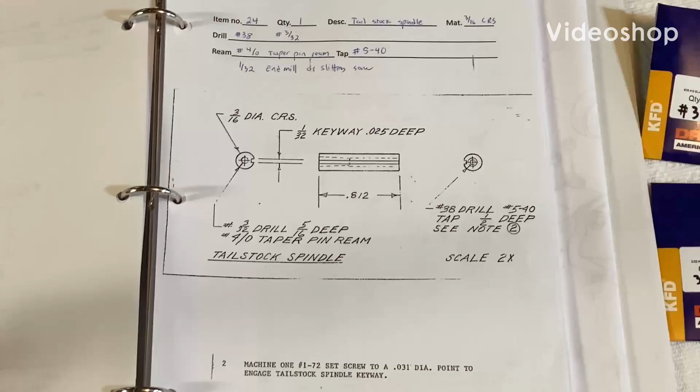Okay, we're back on the lathe again, and this time I decided to do the tailstock spindle because it uses the same 1/32 end mill that I used on the other piece, and that's that guy right there. So since I had it out and it wasn't broken yet, I decided to go ahead and start this one.

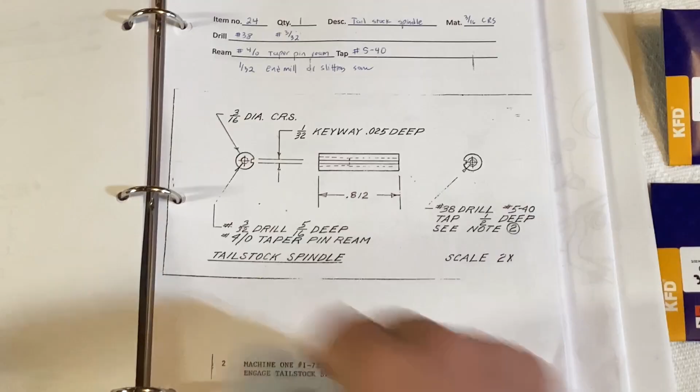Now this one's a little bit easier because it's less than an inch instead of 4, and it's only 0.025 deep, which is 0.2 of a millimeter less deep than the other one on the other part in the previous video. Now this one is from a 3/16 diameter cold rolled steel, which is this, came in the kit.

Now I already did the slot, because it was pretty much the same as the other one. Notice right there, that'll get trimmed off, obviously. And this is actually 1 inch from that point to here. So I got plenty for the part off tool, plenty to fix that.

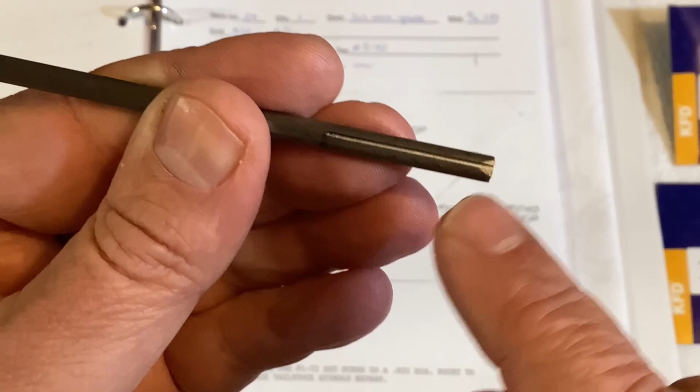I did that first before the lathe, so there's less back and forth between the lathe and the mill. And also I figured that would kind of help guide the cutter into the work, maybe. I don't know. Sounds good to me. So again, that's that part done.

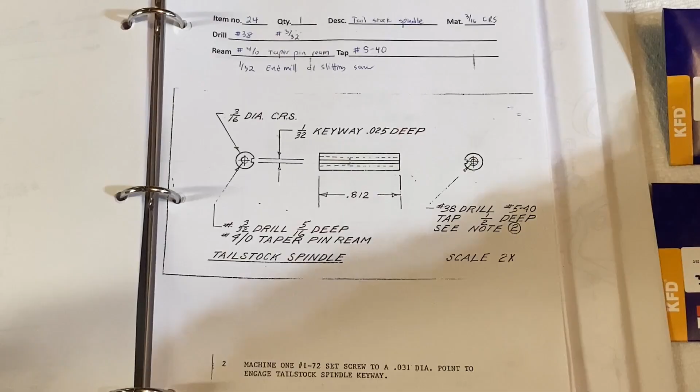The next part is to take it to the lathe. And as you can see, that end gets a 3/32 drill, 5/16 deep, then a taper reamer. And here's the taper reamer, for the kit-included taper pin, that will become the dead center.

A little bit rusty, got to clean that up. And that just says 5/16 deep. And then drill and tap a 5-40. Right here, see note 2.

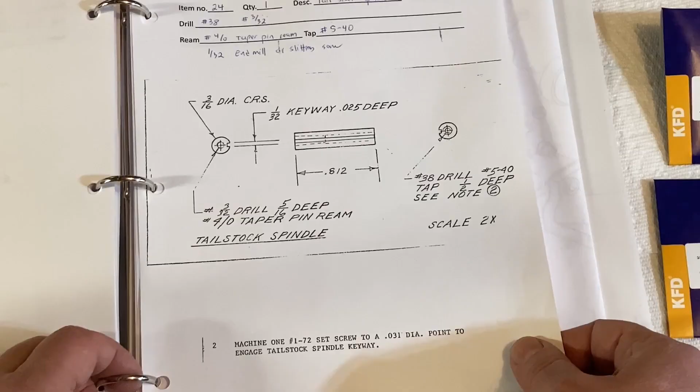There's actually 2 note 2s, and that's kind of my fault because of the way I cut up the drawings to make individual pages. Because on one page, note 2 says to machine a set screw to fit that slot. But on another page, note 2 says that the thread should be left-hand thread.

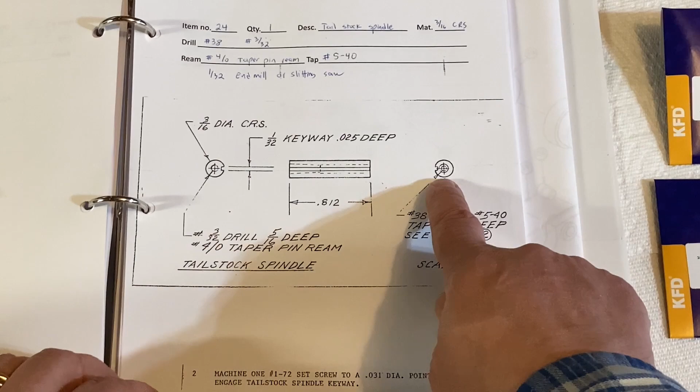So anyways, I do have a left-hand tap and I have a left-hand die. So once I get this one done, I will make this, and that's also out of the 3/16 cold rolled steel, same material. All of this will be done on the lathe except for the square end here. I'll put that on the mill to do that, but I'll do the lathe work first.

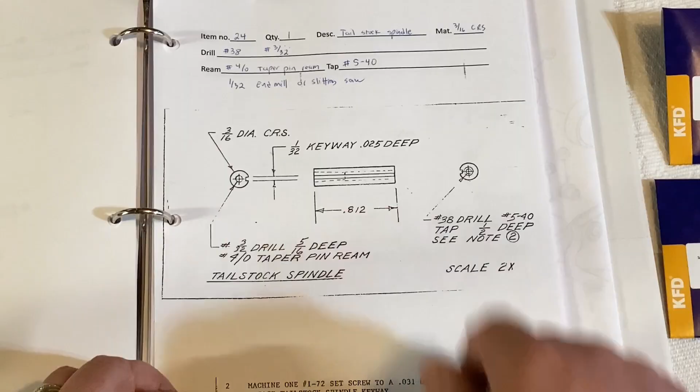But anyways, I'm going to stop rambling. I'm going to set that up in the lathe and drill and ream and drill and tap. Let me get that set up and I'll show you what it looks like.

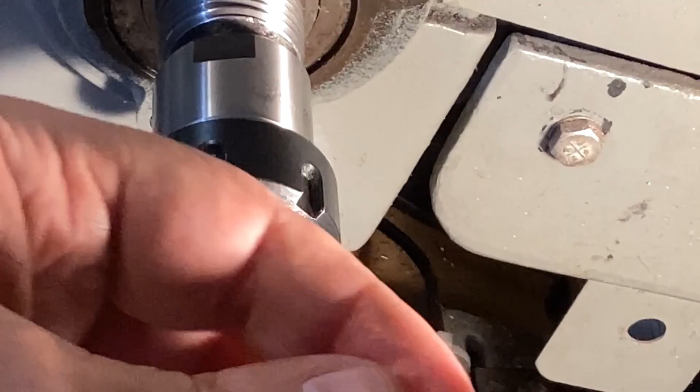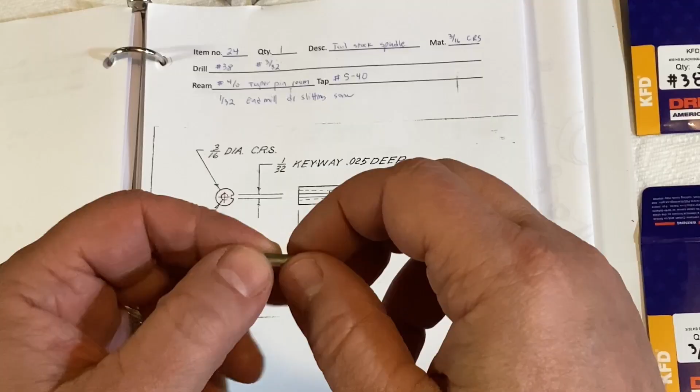Okay, so with my lathe setup, it's kind of hard to get a good camera angle. That's something I'm still experimenting with. So hopefully you can see okay. I was having a hard time getting it in focus. But this is the part right here. See if I can get that in focus. I think I need to build bigger things because I'm having a hard time focusing.

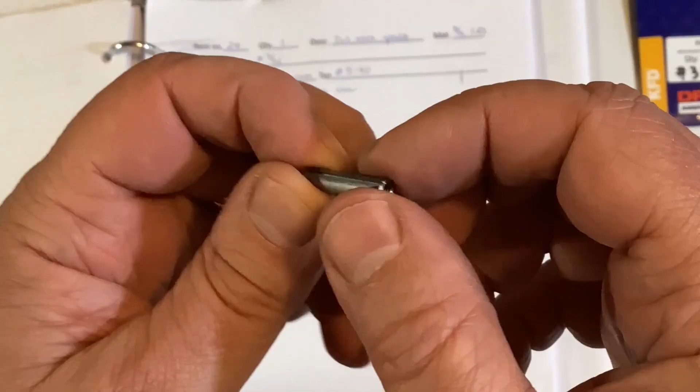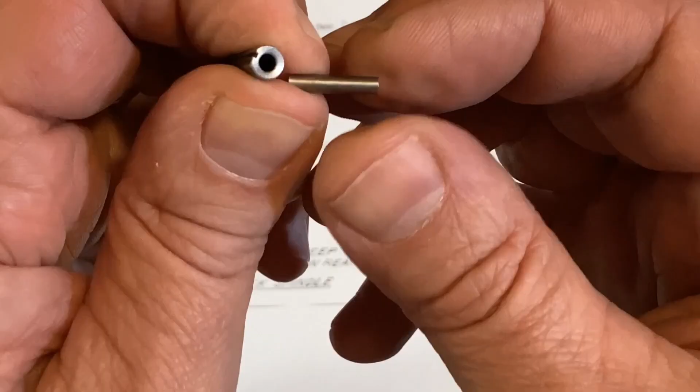So there's the part. Now this end is supposed to be a taper for the taper pin. And as you can see, it's not going in there. It'll start, it'll just start, but that's it. It's not going in any further than that.

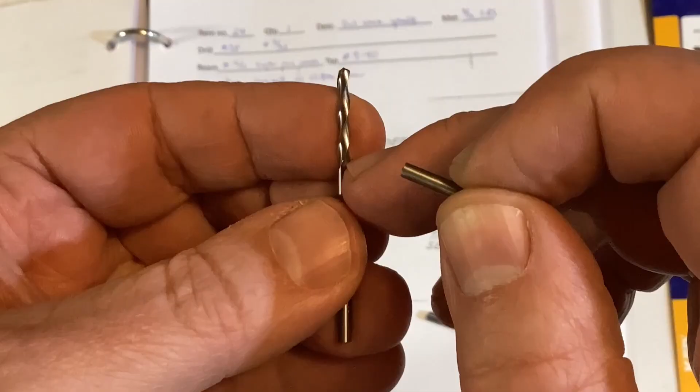So the taper reamer that it calls for, I thought I had one. I thought this was it. Because when you compare this to the pin, I mean, I realize I just eyeballed it, but I thought that had to have been it. I'm like, that's got to be it. But apparently, that most outer diameter is pretty much the same as the starter drill for the correct reamer. So that did not work.

So I'm going to have to order a reamer. This is one that I've had for years. I don't even remember where I got it. It just ended up in all of my random drill bits. So I have no idea where that came from.

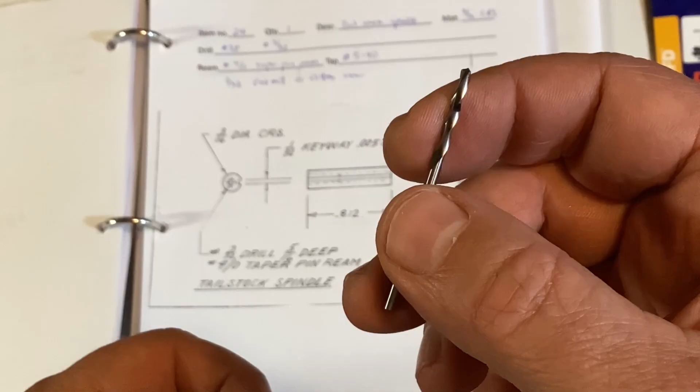So yeah, now I have to buy one, and the cheapest one I've found so far is like $15 plus shipping. That kind of sucks that I got to buy one when I thought that I had one. So that's not that big a deal. Once I get that in the mill, it'll be pretty easy to just go through and ream that until the pin fits in. Now the threads, again, that is a left-hand thread.

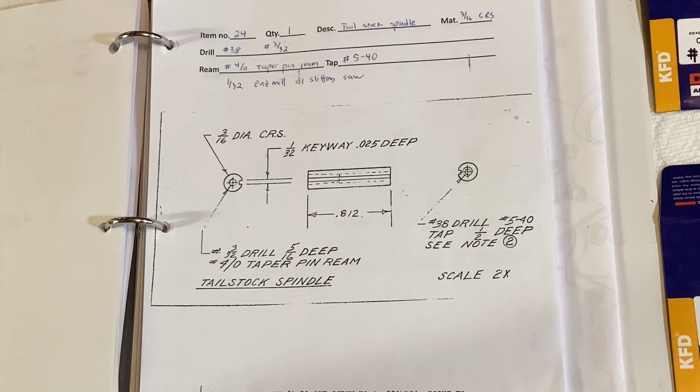And the issue with that, I'm not sure if I did it right. I don't think I did.

Right there, that point. So from there to there is the tapered pin, the tapered ream, and it said to go 5/16 deep. And then from there to there is the threaded section, and it said drill 38, tap 5-40, 1/2 deep.

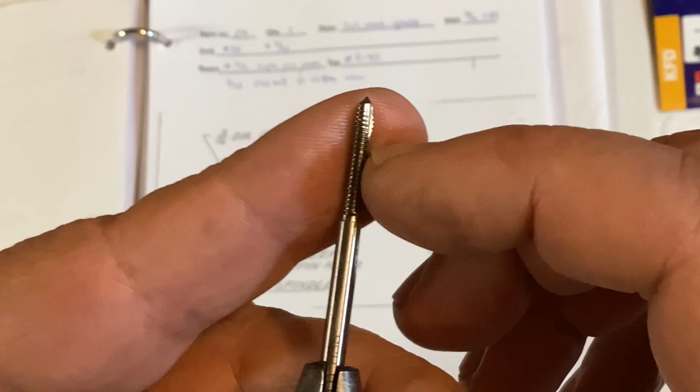Obviously when you look at a tap, unless it's a bottoming tap, which this is not, that first part, those threads aren't going to be usable. So there's that much that you would theoretically have to drill deeper if you want 1/2 inch of usable threads.

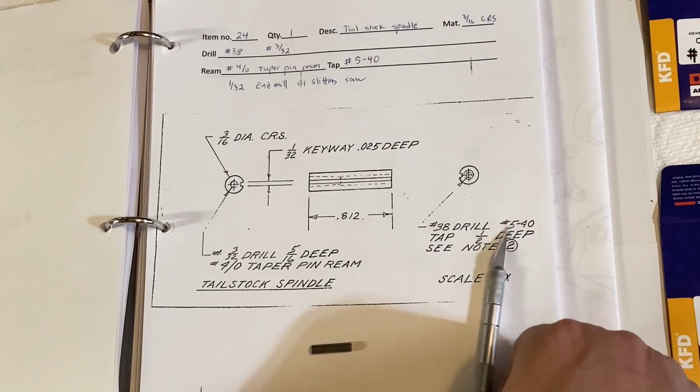So in other words, I'm not sure if I was supposed to drill 1/2 inch and then tap, or drill it to where I could tap 1/2 inch. In order to tap in 1/2 inch, I would have had to have drilled it deeper, like into here, which would have interfered with the tapered pin, which means the tapered pin would have to be shorter or stick out longer.

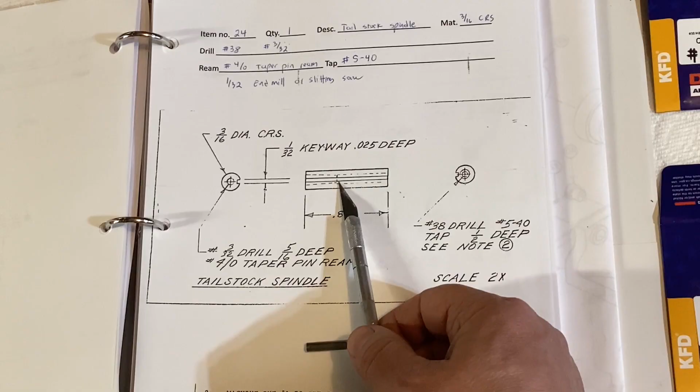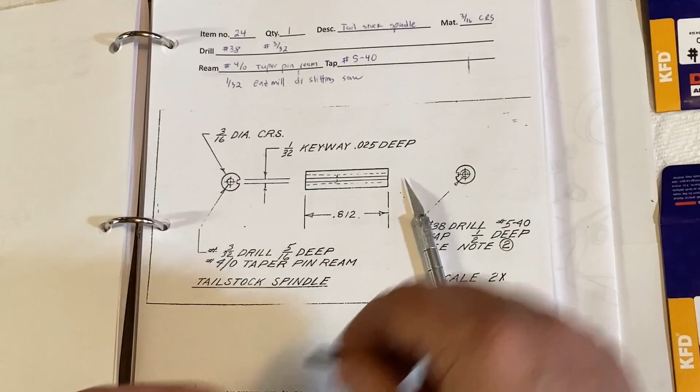If you just drill it to 1/2 inch and then tap it, your usable threads are going to be a little bit less. When I was threading this in, it should have pretty much bottomed out the tap if I wanted 1/2 inch of threads. As it is, it went in about like that, so I'm going to lose about 4 threads of being able to turn this in or out. I don't think that's a big deal.

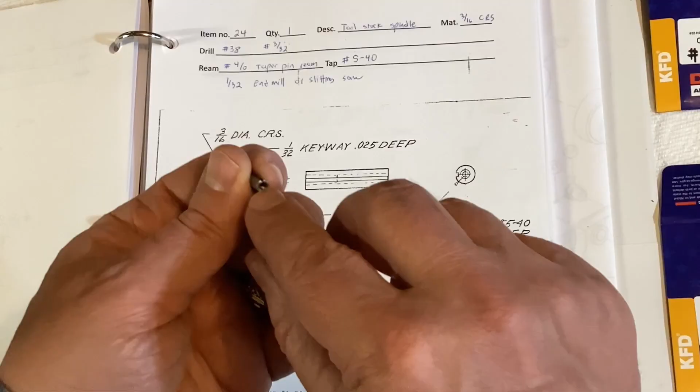It'll still work, just that I'm going to lose a tiny bit of travel. I could drill in more and tap more, but if I drill in more I'm afraid I might mess up the threads I already made, and that would really suck. Well, I'm not that worried about it. Like I said, this is just a model, not a functional lathe. It's not like I'm going to have to move it full travel, so it'll still be fine. I'm not that worried about it.

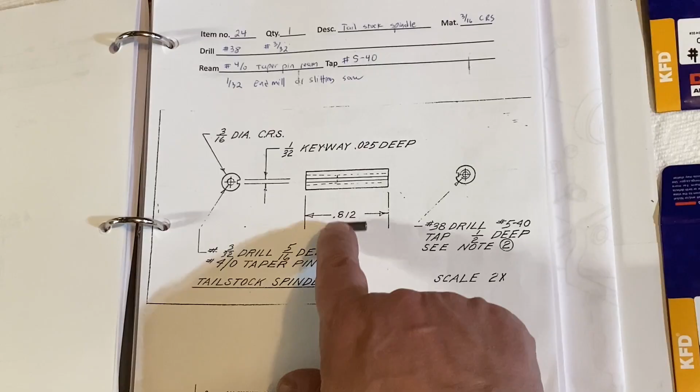So this part is done except for the reamed end. Like I said, I have to order a reamer. But I want to go ahead and start on the next part, and that would be this. It's going to be made out of the rest of the stock here. So that gets chucked up in the lathe.

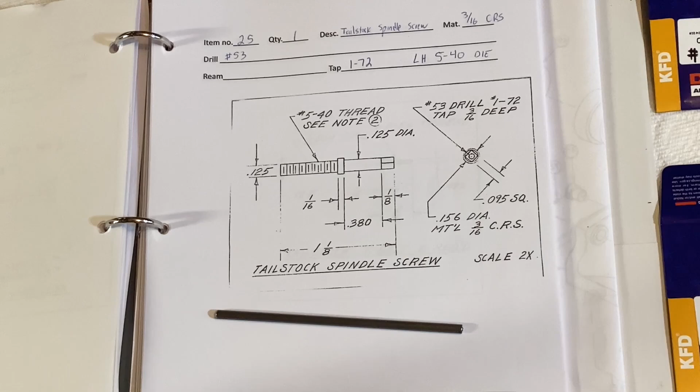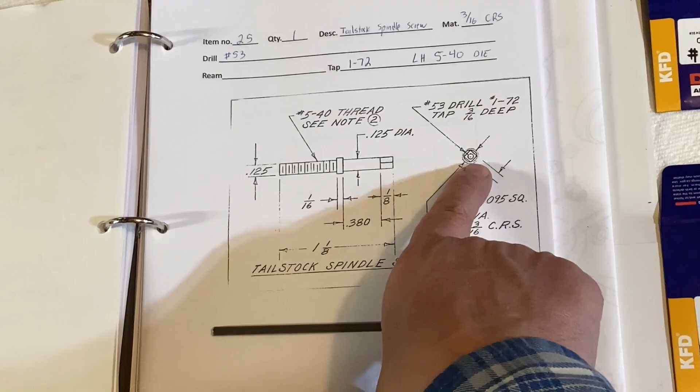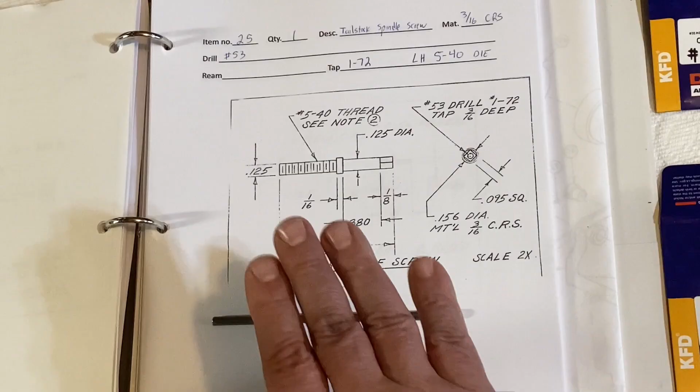I'm really kind of debating order of operations here. I think what I'll do is turn the outer diameter first, turn the whole thing to the correct outer diameter. Then I'll take it out of the lathe and put it on the mill, using a four-sided block collet to make the flats, the square end. That way I can hold it in a collet on that end and not worry about messing up the threads. Then I'll flip it around in the lathe, holding it by here, to do the threads. So that's the plan. I'm having a hard time with the camera on the lathe, so I don't know how much of that I'll record versus just show you at the end of each step. Let me get that in the lathe and we'll go from there.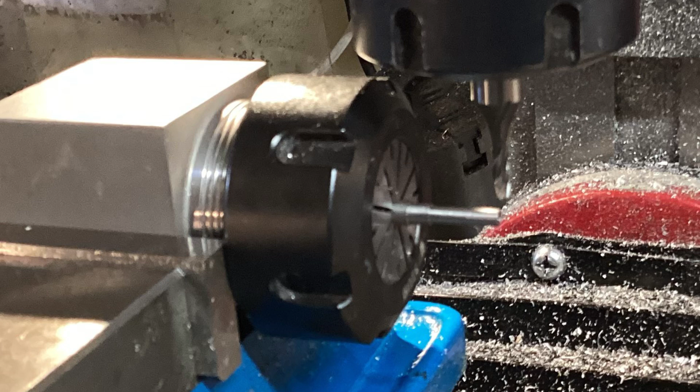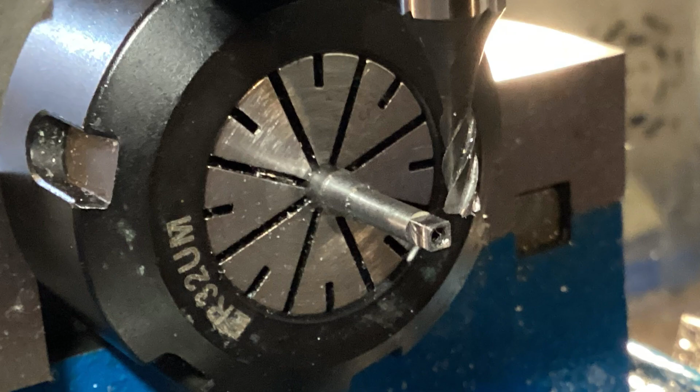All right, so here's that piece back in the lathe. I got the end turned down to the correct dimension, and then I'm threading the 1-72 tap into the end of that. The next step is I put that in a 4-block collet in the mill and set that up to mill the square end. And there's the end with the square milled into it.

My collet block is a cheap China one, and I noticed that when I flip it over, I have to reset the Z. It was off by almost 0.5 millimeter. I don't know if that's normal or just because I got a cheap one, not too big of a deal, just a little annoying. But that's the end all milled down and ready for the lathe again.

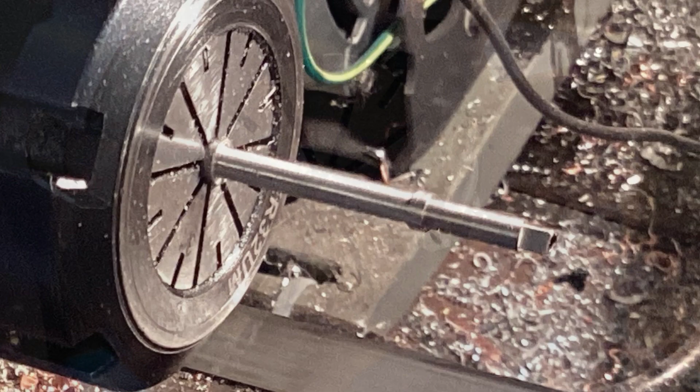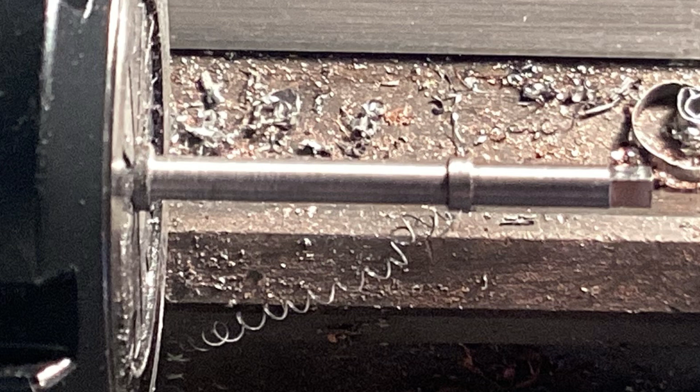Back in the lathe, I got the other end turned down to the correct diameter for the 5-40 thread. After that, I just part it off to the right length and then flip it around in a different collet, and then I can tap the 5-40 thread. Just another view of it, so you got the square end on the right, a little shoulder in the middle, and then a little over 1/2 inch turned down for the 5-40 thread.

And that's the die in my new die holder. I'll show you that a little bit better later on in the video, but that's just getting ready to thread the end of that.

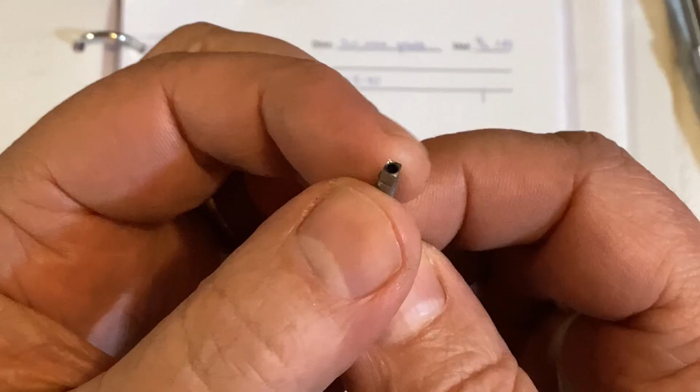Here's that part off the lathe, and we got the square end. Got that end tapped for a 1-72, which was a little nerve-wracking because for me that's a small tap, and I've never tapped a hole that small in steel, so I just took my time, went slow with it. But the square came out really nice, I'm very pleased with that. And there's the left-hand threads on that end, and those came out pretty nice too. There's a little bit of area with no threads because the die can't go all the way to the shoulder, due to the lead-in section of the die. Now, once I got those on there, I went to thread it on here.

Oh, and you'll notice you can see the marks of the threads at the bottom of the groove there. I'm not sure if that's because I cut the groove a little bit too deep or if that's just normal for what that is. It doesn't affect anything, it doesn't hurt anything.

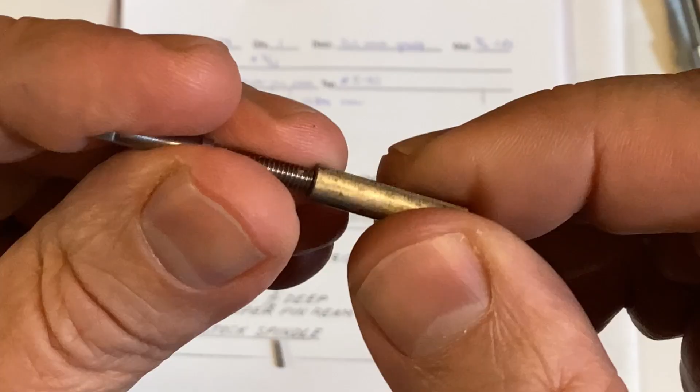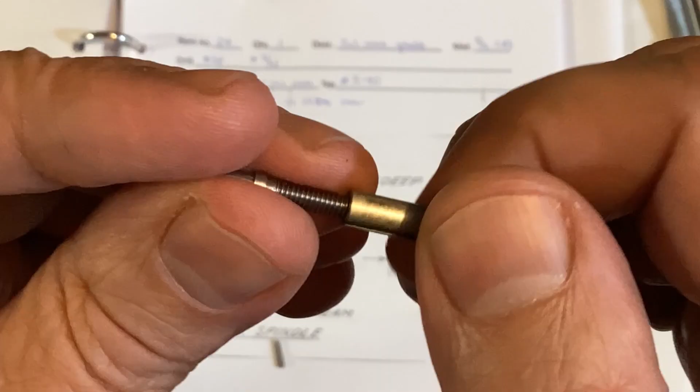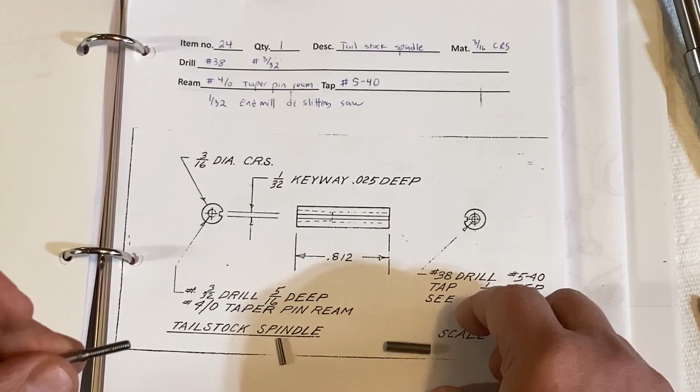But when I went to thread that on, it only went on a little bit, like maybe that far, then it just kind of stopped. And so what I did was... remember I was talking about not knowing how far to drill or tap because I didn't want the threaded area to interfere with the tapered area. But I did notice that after I cut those threads, the threads are pretty much exactly half inch.

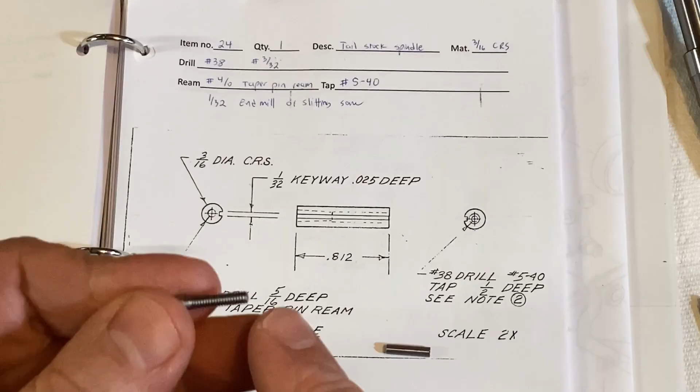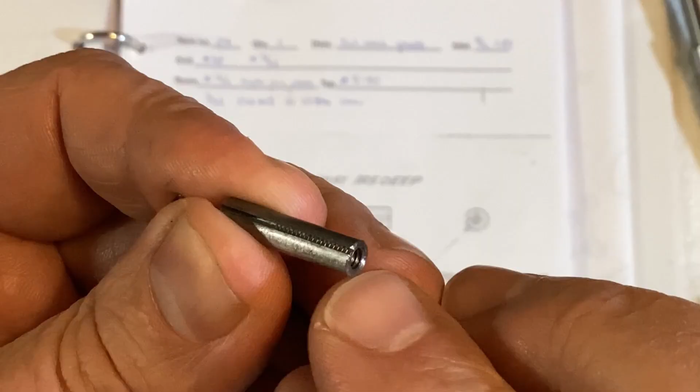And it said to tap half inch deep. So I'm under the impression they want all of those threads to go inside of there, which means you have to drill deeper than half inch for the tap to fit. So I re-drilled at the risk of damaging the threads. Fortunately, I did not damage the threads. I very carefully re-drilled deep enough to thread all the way in, and it still did not want to go in there.

It went a little further, but not far enough. So the die is an adjustable die. So I backed that screw out maybe half a turn. I also got to use this new tool that I got.

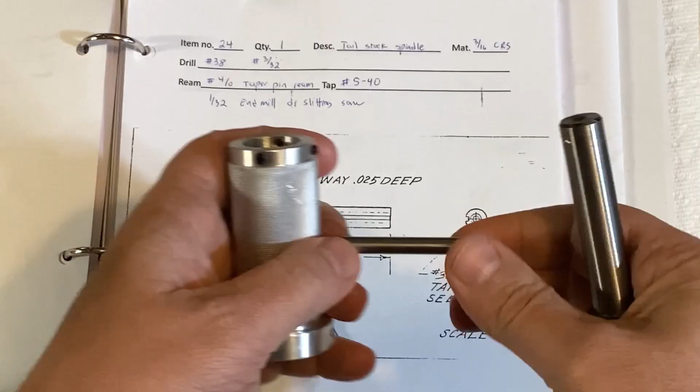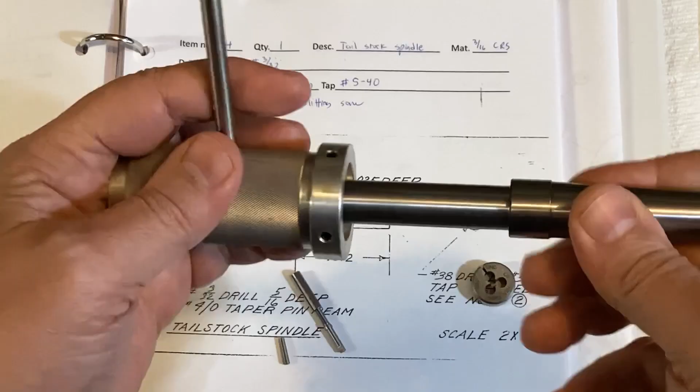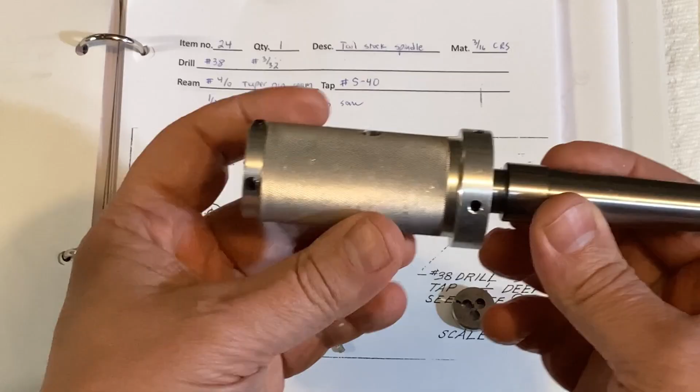This is to hold dies, and it'll hold two different sizes. You can put a die in that side or that side. And that's a Morse 2 taper, so that goes right into my tailstock. You can put that on there, and that little handle, you can pop that out. For as small as that is, it did not need that handle. And that just holds your die, and you can get it started nice and straight.

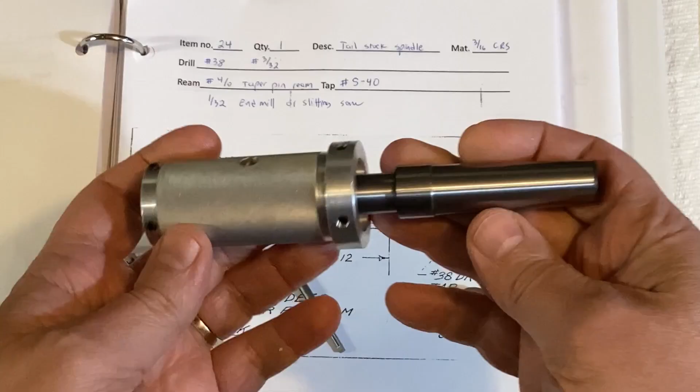And I got that from a little machine shop, I think. It was at the Model Engineering Expo in Pennsylvania this past year. So they had a little booth set up, and this was not that much money. I mean, it would have been an easy thing to make, but you know, you go to shows like that, you're in the mood to spend money.

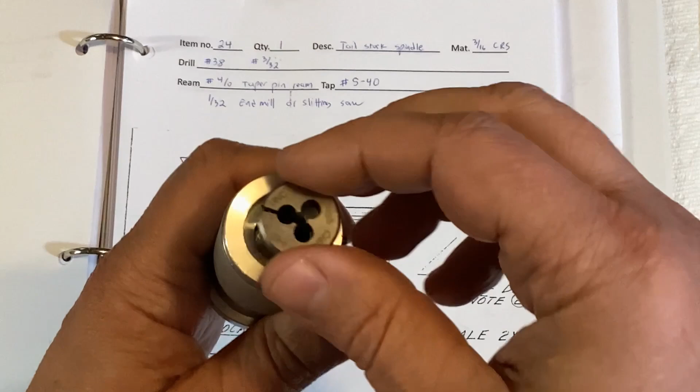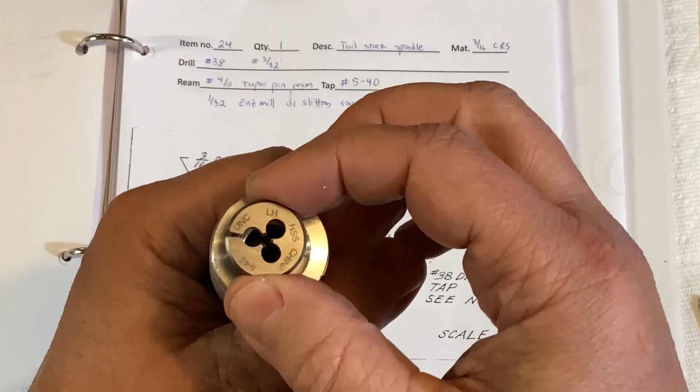So anyways, that goes in there. You have set screws on opposite sides. So you loosen the screw here, put that in there, and then when you squeeze those screws down, it squeezes that die down. So I just loosened that screw maybe half a turn, put it in there, did it again, and that was the ticket. That made it pretty much perfect.

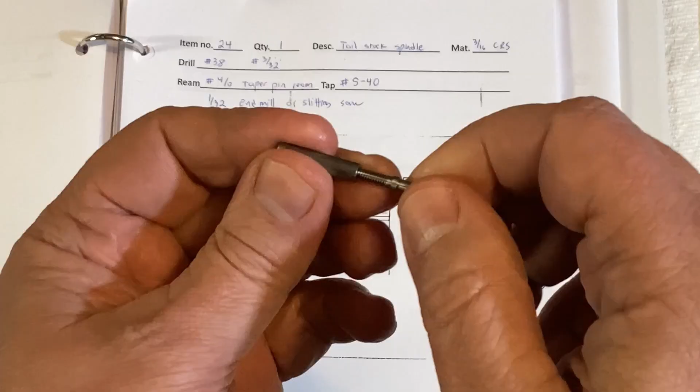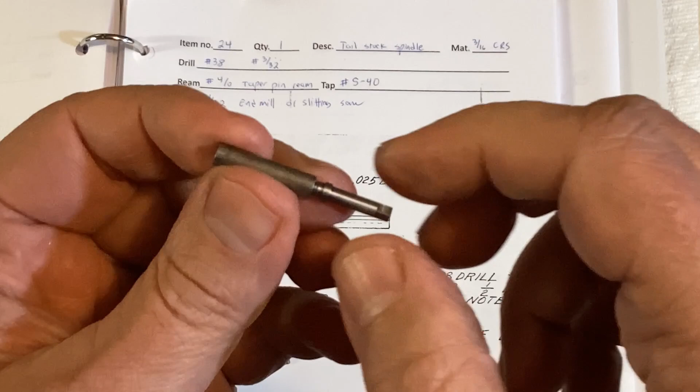So this now, again, left-hand thread, that now goes in there pretty much all the way, almost. I got one thread left, but I'm calling that good. So this part is done.

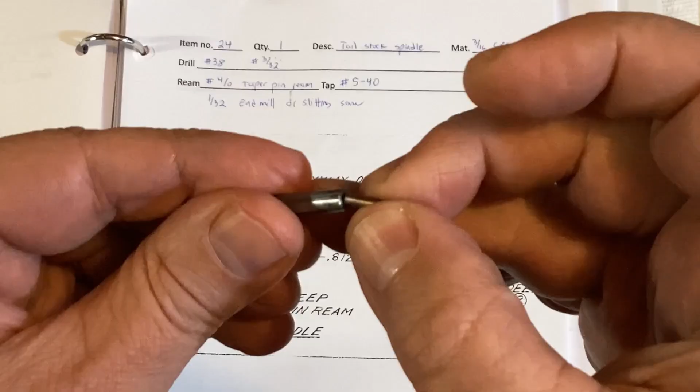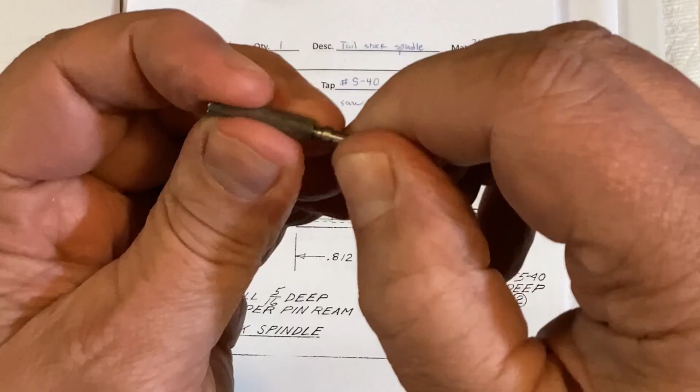And I ordered a taper reamer for this. Once I get the taper reamer, I'll ream that open for that, and then I'll turn the point. That'll be the dead center. And I'm going to ream it to where, just like on the real one, once that is screwed in, that last thread, I want it to pop out the dead center. So I'm going to ream it, so hopefully that happens.

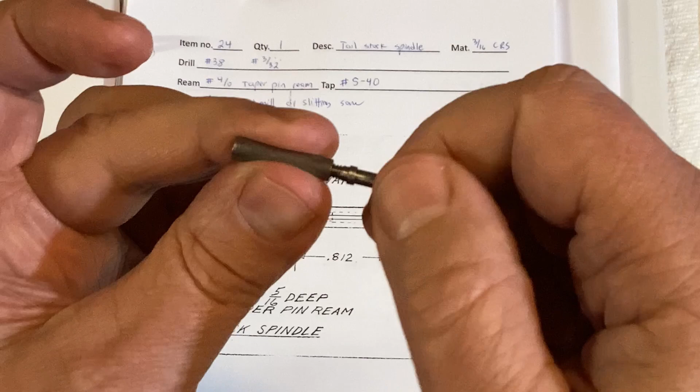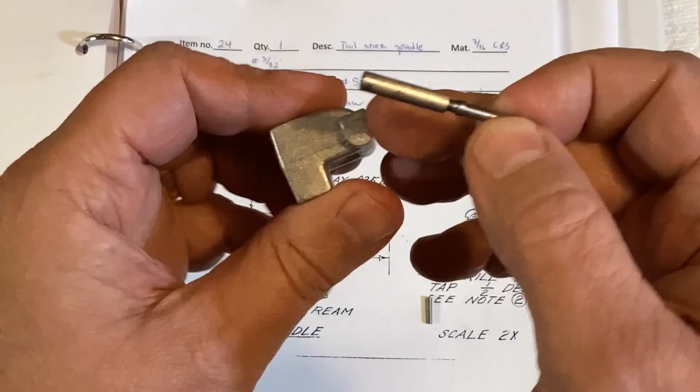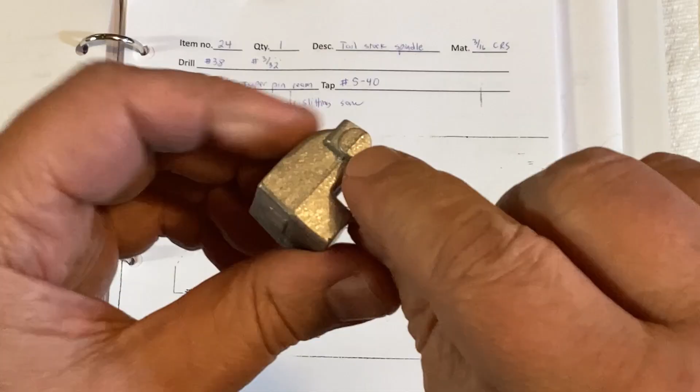And this then all fits in here. That's the tailstock. Obviously, that's just the raw casting. I have not done anything with that yet. I would really love to bore that out and put that in there so I could have a functional thing, but I'm assuming that the exact location here is determined by how much I mill here.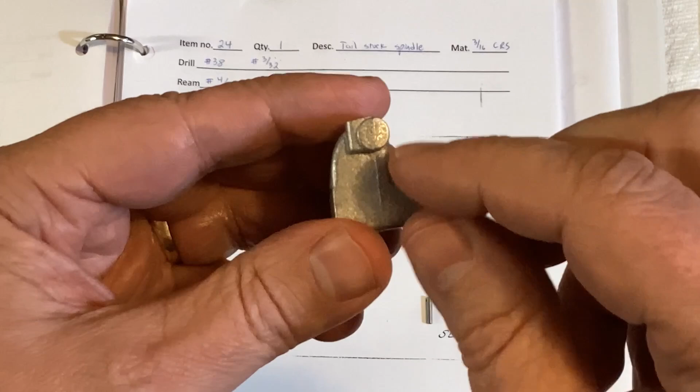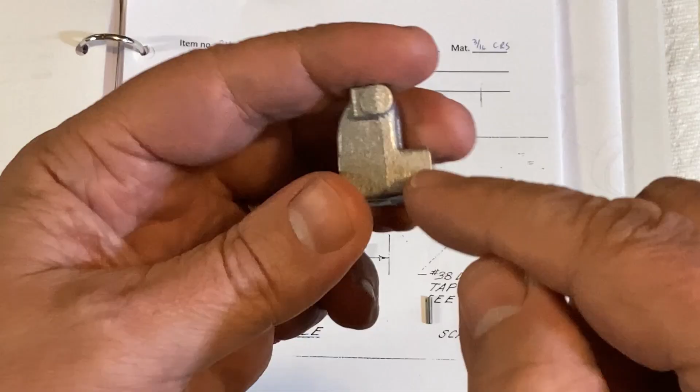I don't know yet. I have not even looked at the prints or the instructions for that yet, but I definitely don't want to get ahead of the game. But obviously from here to here has to be the same on the tailstock and the headstock. And this gets machined to fit the bed. There's a lot of unknowns here that, like I said, I haven't even really thought about that much yet. So this is a problem for future me.

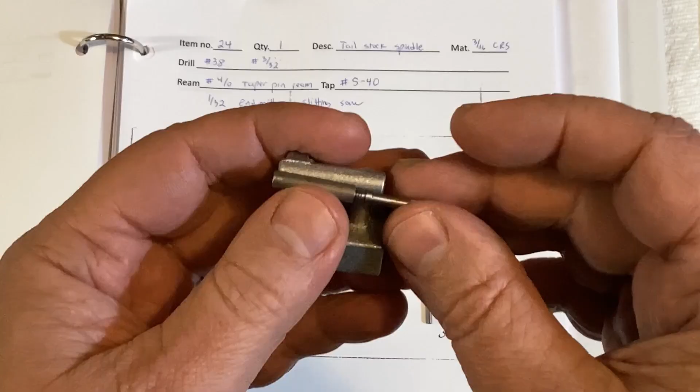But I just wanted to knock those parts out because they were quick and easy. And like I said, I had some downtime on my other projects. So I'm going to call those done for now. I don't know when I'll get back on this build.

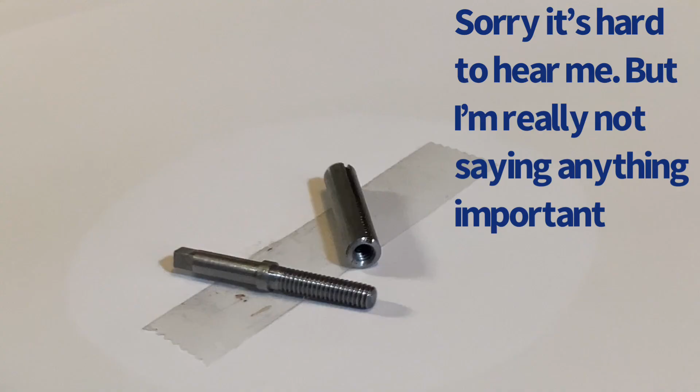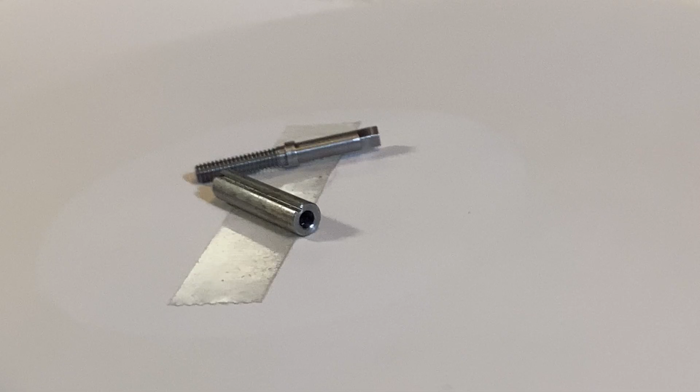But that is going to be all for now. I know it's only a couple of small pieces. And for most people, those parts probably wouldn't be that big of a deal. But these are pretty much the smallest parts I've ever made in steel to any amount of accuracy. So I'm very proud of those, very happy with those, the way they turned out. And I know sometimes it can be hard on camera when you're zoomed in to tell exactly how big or how small something is. So here's just a random coin I found on the sidewalk for scale.